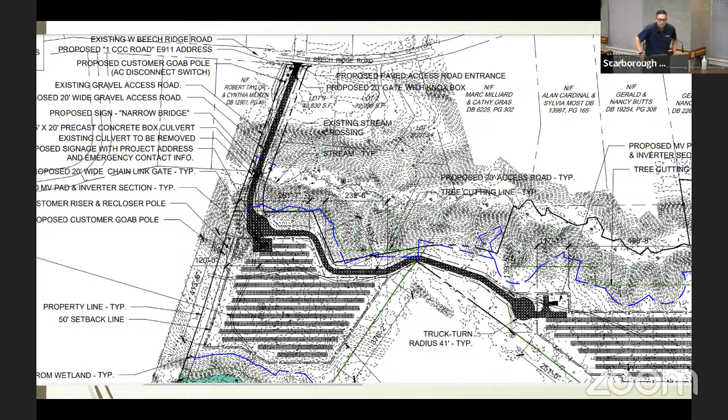Thank you. Let me turn to the board. Any last minute questions, concerns? I have none, Madam Chair. Staff feels comfortable going forward.

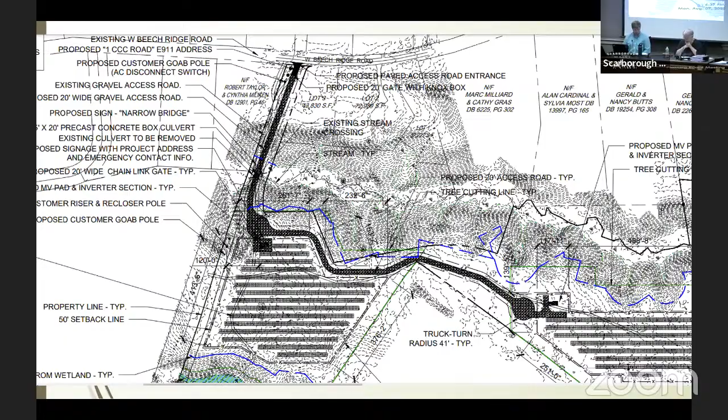Therefore, I have a draft motion. I move to approve the project titled Waterhouse Solar proposed by MEVS LLC as depicted on the plan set prepared by C Energy dated 7/20/23 with the following findings and conditions. Findings: the proposal is for a 2.66 megawatt AC ground-mounted solar installation in the area of 22 West Beech Ridge Road, Assessors Map R42, Lot 2D.

As part of the proposal, the applicant will pave the first 40 feet of the access road from West Beech Ridge Road and replace the existing culvert over Finnard Brook.

Conditions: 1, prior to issuance of a building permit, the applicant shall: A, pay the tree growth withdrawal penalty as determined and approved by the assessing department; B, address comments in the staff memo dated 8/7/23; C, address comments in the Haley Ward memo dated 8/1/23; D, provide finalized surety document in accordance with performance standards for utility scale solar energy systems; E, provide an interconnection agreement from the energy provider.

F, execute and record a stormwater maintenance agreement with the town. The form of the stormwater maintenance agreement is located in Appendix 1 of the Town of Scarborough, Chapter 419, Post-Construction Stormwater Infrastructure Management Ordinance. G, install a private driveway sign in accordance with Chapter 309, Town of Scarborough Street Name and Number Ordinance. The sign shall be white with blue lettering, a minimum of 6 inches in height with lettering not less than 4 inches in height. H, address planning board comments as discussed in the 8/7/23 meeting. This shall be reviewed by the planning department.

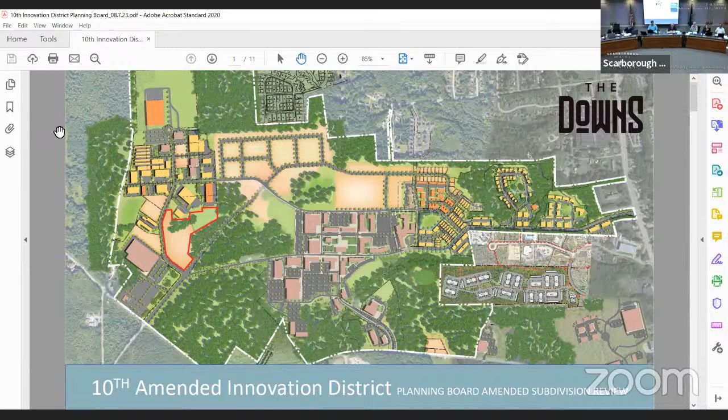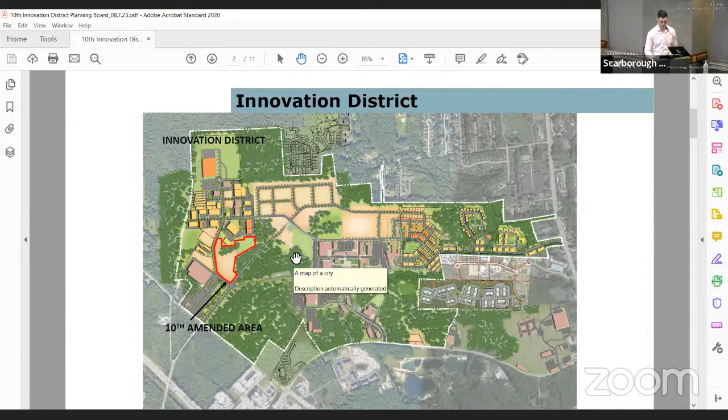So I'm going to skip forward here. I just wanted to orient the board on the location of our application. It's right here in the red, so you can see on the screen. This is the 10th amended subdivision for an innovation district presented in front of you here. Costco is located just across Innovation Way, which is on the northern part of the plan, east on this plan.

Wanted to quickly go over the subdivision scope. Eric did a good job introducing it. A little bit of background: in April of 2022, the board approved the master plan amendment that updated the developable area, and so here we are in the next step for the subdivision application. This scope includes modification of the Lot 2 property line and the creation of a Lot 55 located along Innovation Way.

Included with this will be the trail realignment through Lot 2 previously, and I have actually a next slide that shows kind of the comparison for those two, so I'll wait to speak on that. And I did want to mention that the Maine DEP permit is in hand for this, that was received back in March of this year.

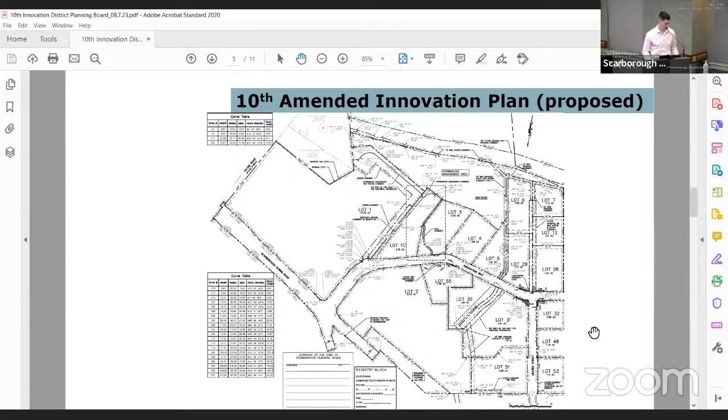This gravel wetland facility will outlet down to an existing ditch that runs east-west, kind of in a field area south of the Innovation District, and then it intercepts another ditch that carries that flow down to Millbrook. So we're not touching any of that infrastructure as part of this proposal, we're just building the pond and outletting it and doing some slight reconfiguration of the initial ditch. And then it's got another 1,000 to 2,000 feet until it gets to the Millbrook tributary down over by Sawyer Road.

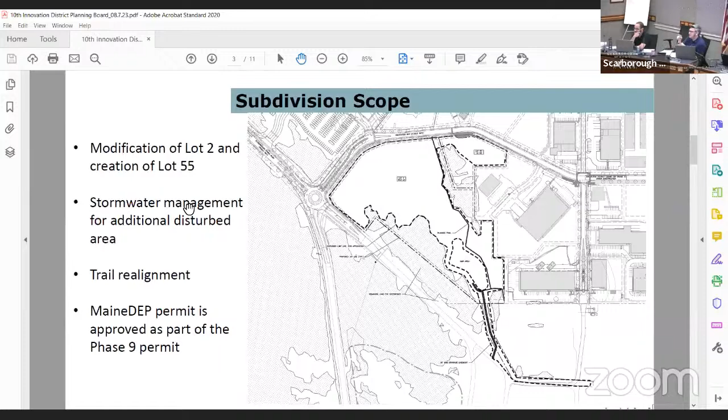Going back to the trail, the original trail images, are there sidewalks? There are sidewalks on either side as it exits out on the Costco Innovation side, is that correct? Correct. And was the realignment of the trail meant to just better suit it to contour against that lot 2 that you're proposing here? Correct. It's just so if any future development there, we're not working around a trail, and it's hugged more towards where the natural resources are, a little bit more trail-like, if you will.

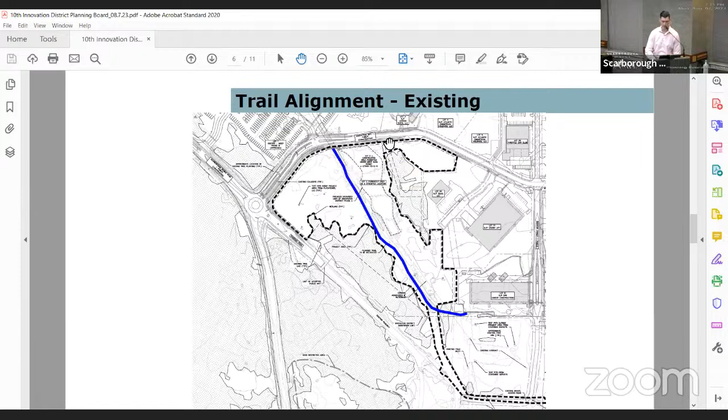Correct. I don't think surface pavement's on Innovation Way yet, so the final configuration isn't there, but the crossing you're referring to is, I believe, right here where there's actually some trailhead parking. The previous alignment brought the trail goers across Innovation Way here and then across there. So I think if anything, this trail alignment is probably a little bit more centrally located by where you'd park and cross. That's one of the benefits of moving the trail here.

Okay, great, that's really helpful. Thanks. My only request with regard to that would just be that the trail is continued in its width to wherever that crossing is. And if it transitions from a stone dust path to a more concrete - no pun intended - sidewalk surface, that's fine. I just think the width is kind of key there.

And I think I saw a note that this trail, the relocated trail, is intended to be 8 feet wide and stone dust. Is that right? So this blue trail is going to be 4 feet wide. There's going to be an access path down here for the stormwater facility to access, that'll be 10 feet wide. A portion of this access path can be used as a trail indirectly, kind of connecting. So that's where the difference might be.

That was my question, was how would someone know? Maybe they don't care, or maybe we don't need them to know whether they're on one or the other. But in terms of navigating, I don't know if there's an overall plan down the road to identify by map or website that the entire development on the Downs is coming with a pretty significant network of trails, which I think is great. Which I sort of know, but that's because I'm sitting on this board seeing all these plans constantly. I think it would be really important and a tremendous amenity to this community to have an easy way to communicate that to the greater public. This is a small example of that, such that you could look at a map and be like, oh, this is a maintenance road that goes to a stormwater pond versus the trail that I want to take to get up to wherever I'm going. So just a little wayfinding question there.

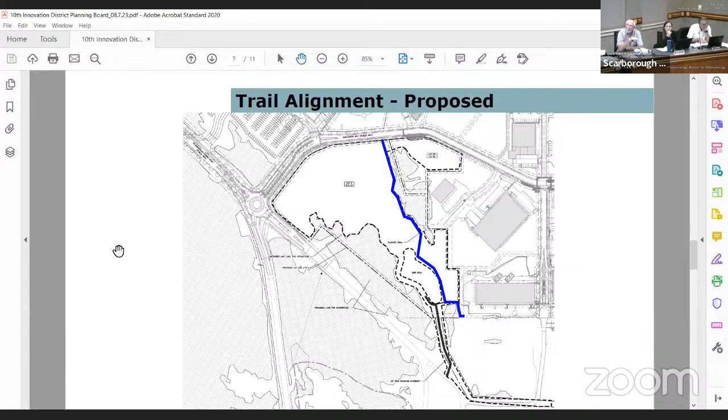If you didn't clear it all right now, do you see a demand right now to clear this and start marketing it right away? And do you see a demand right away to occupy these lots? Yeah, I think speaking to the success of the Innovation District so far, and having all the lots sold out, I'd answer that as yes. Okay, that's all I have.

Thank you. I've got a couple of comments that kind of lead towards what would happen if an applicant came forward with a project for this lot and for lot 55. So I look at lot 55. It looks as though a section of that lot along the street is located where the map of the Innovation District is and the various mailboxes. Is that correct? The mailboxes are further down, but that's the trailhead parking and the sidewalk that bumps around it that we're providing an easement for. Okay. I guess what I would say is the applicant comes to us sooner or later for lot 55.

The placement of a driveway there is going to be very important because of both the turn and the placement of the trailhead, and the location of the mailboxes, which actually on C100 looks as though it's really part of lot 55. So just keep that in the back of your mind as you're looking at that.

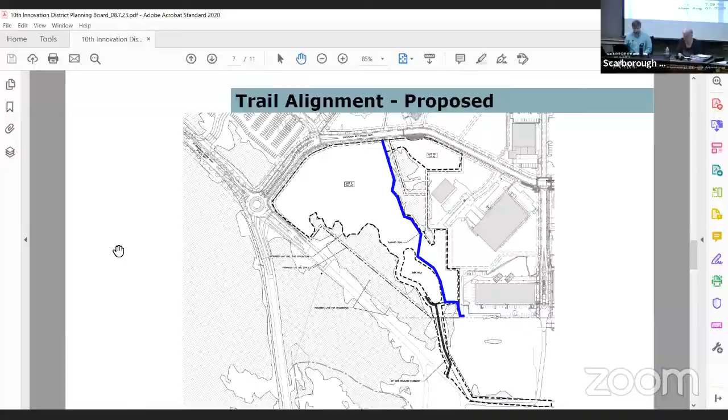Second. Thank you, this is seconded by Roger Beely. Doreen, please call for the vote. Roger Beely, yes. Jennifer Ladd, no. Rick Manking, yes. Rachel Hendrickson, yes. And Jim Huber, no. 3-2, the motion passes. Thank you.

Thank you. I think you should take the rather unusual split vote into consideration as you move forward on this. Understood, thank you.

Next item on the agenda, item 4.04: Allagash Brewing Company requests site plan review of a 9,300 square foot tasting room and demonstrative brewing operation.

Allagash is in front of the board with a site plan request for a tasting room and accessory kitchen at Scarborough Downs. The tasting room would allow for demonstrative brewing as a small batch processing use. Staff's primary concerns revolve around the parking lot landscaping, architecture facing Market Street and the parking lot, as well as a potential overflow parking area.

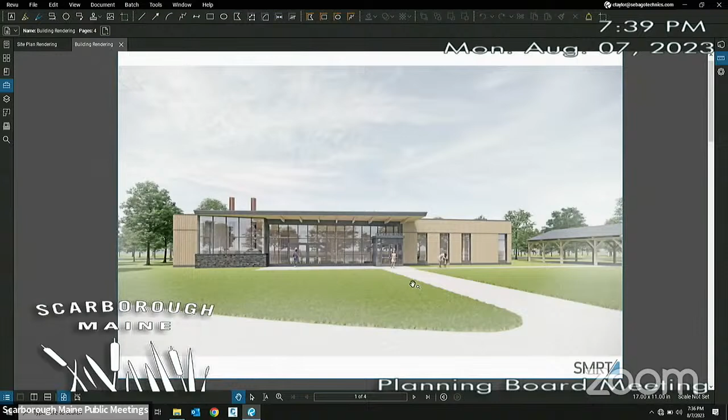The materials are really a modern take on traditional materials. We have heavy timber structure, board and batten siding, masonry which gives you the anchoring to the ground, and also helps identify the showcase of this site. Our rendering doesn't do justice for what's behind that pop up to the left, but that is the home for these beautiful copper kettles, antique brewing equipment from Belgium. That strange trapezoidal shape is a recreation of the space it was originally built into in Belgium, from a strange intersecting street. These kettles are put on display, raised up off the ground, so as you walk by or drive into the site, it's the beacon to come and see, this is their sign, their demonstration equipment, and the reason everyone's going to want to come.

So you can see the kettles extend out through the roof. On the days when that beer is being brewed, there will be some steam that comes out, which will make it look very cool. But overall, we are not showing the correct landscape here. I should note, this is sort of an as-if-it-were-in-Texas landscape, dead flat with a couple trees out back. Please don't take that landscaping image to heart.

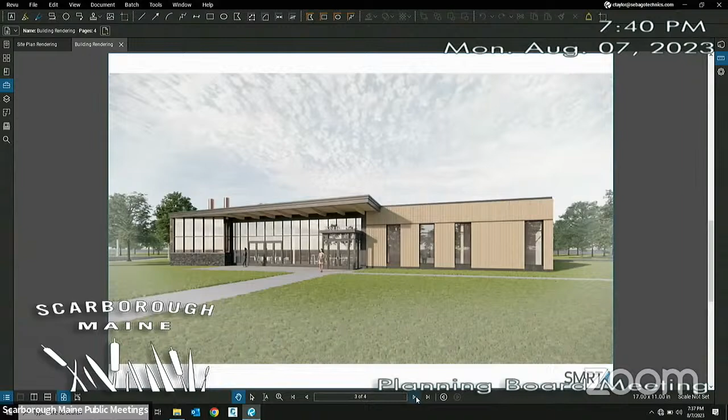Wayfinding was mentioned before in some of the trails discussions. I think one of the things we did effectively here was proportion the materials and the glazing, as well as that pop-out entrance, to help people find their way into this space. If that trapezoidal space with the copper kettles is the reason you're coming, you know the pop-out entrance with the Allagash sign is the way to get in.

One more, just a close-up. The heavy timber structure reflects Maine's tradition of heavy timber woods. This is one of the goals of the project, really sustainability, low embodied carbon footprint. So the structure goes a long way to bring that to the site and to the project.

I guess I've worked through all the high points of what I wanted to hit. Happy to answer any questions if there are any about the look and feel of the building.

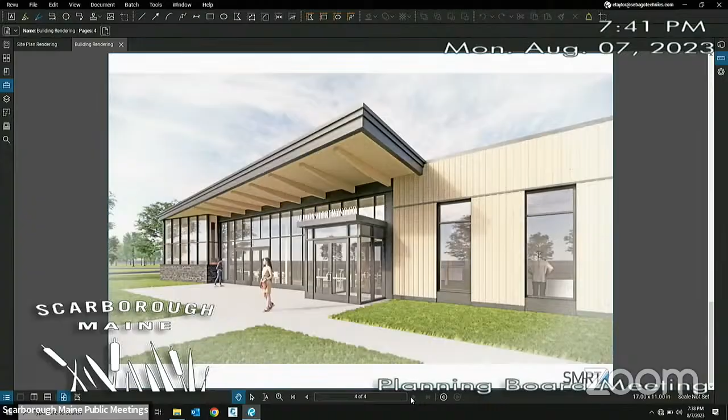Thank you. Go ahead, Jim. You have a question? Thank you, Madam Chair. Andrew, question. So what siding is being used on that in this particular rendering here? What's the rest of the siding? I guess the building siding going to be?

What's the material? Yeah, so I'll go back to the site plan because I'm an engineer. At the corners there, we're seeing in plan at the base a masonry coursing, and then on this backside where the employees have a break room is another anchor, a band of masonry going up the side of the building. The balance of the building siding is, as you see here, board and batten cedar. Cool.

Thank you. Thank you. Are you done with your presentation? I am if you are.

All right, this is an item that is available for public comment. If there is any member of the public in the room or online who would like to comment, please approach the podium. I'll give you to the count of three. 1, 2, 3. Nobody online? Public comment is closed. And turn this over to the board.

I'm just going to go down the line and ask Rick Weinking to start off. Thank you, Madam Chair.

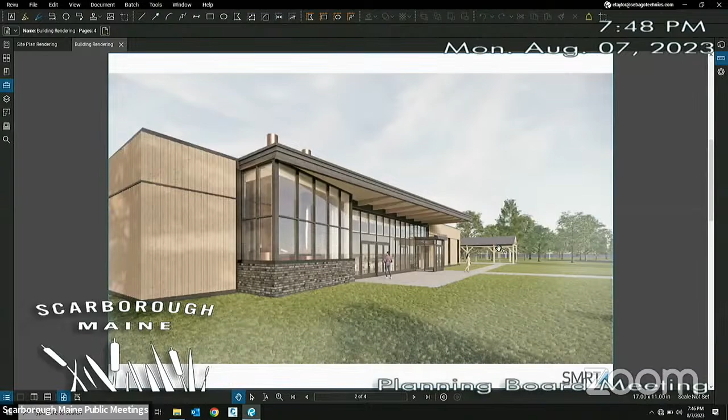Yes, so that building, the orange building you see, this is a canopy structure - that's the orange blob or rectangle you see on the site plan. It's just a post and beam structure. It's at the existing Allagash facility in Portland and they're relocating it to this facility. It just provides some covered seating for outdoor seating, so you can be outside when it's raining in the summertime and when it's nice and warm.

Adjacent to that is going to be an accessory kitchen, shown as a concrete pad right in front of that roof canopy structure. This is intended to be similar to a food truck style, where you'd walk up to an outdoor structure - it could be a building or a shipping container type structure with a pop-out window. The kitchen would be inside of it. You'd order from the window, walk back up to it to get your food.

So it's kind of mirrored around their existing facility. They've basically got a full-time food truck at their facility now, and that's what Allagash is looking to do at this site as well, to provide food to customers while the brewery tasting room is open.

So where does the water and waste all go? Is that staying - is this something self-contained and then moved, or? We are proposing water and sewer stubs to it, and there's a grease trap proposed underground. So we're treating it kind of as a kitchen that would have water and sewer use.

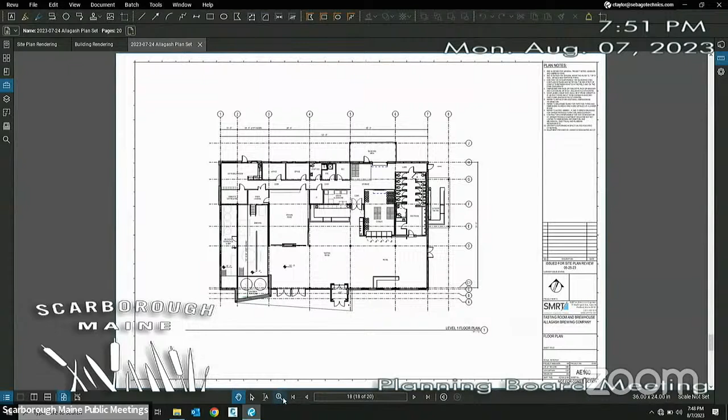So, questions about the bathroom. Effectively, what we have is a non-gendered, unisex stall for every person who enters this space. It serves two masters in a way: it reduces the total square footage required compared to two gang bathrooms, and it also allows for a lot of privacy. It's a system that the Portland campus has been using for a number of years that's worked very well for them, so they wanted to bring that same system across to the new tasting room.

Interesting. Guess I had to go to the one in Portland. You should - actually, I think we held an ASHRAE meeting there many years ago.

But anyway, I do want to note that you have indicated future PV on here, and I'm sure that had some relation to why you positioned the building the way you did, which I commend you on. This is the first time I've seen architectural drawings where the mechanical systems are included with the screening so that we don't see it from the road.

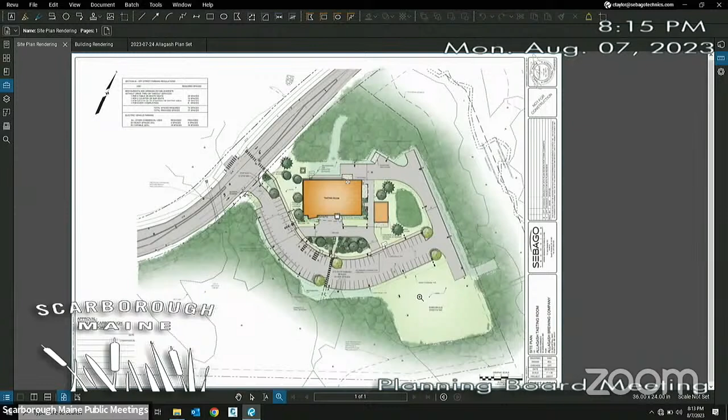So potentially, if you're looking to develop that lower right-hand plan view corner into a parking lot eventually, maybe you have an idea of how many parking spaces you'd be able to put in there, and likely what that design would look like. It wouldn't hurt to put those trees in now. If you have planned ideas for potential shade trees in that area, just go ahead and put them in now, rather than having an open green space that on the hottest of days, not many people would probably go out to. They would probably seek the shelter of a tree closer to the building if they're going to enjoy a beer or another treat at the facility.

So those are my comments about the trees. I'd like to see fewer of the evergreen coniferous style and more of the deciduous style, the shade trees.

The other comment I have relates to lighting. I saw the cut sheet for the light fixture in the site plan application binder. There's one item I'd like to have changed. It's currently with a 70 CRI specification, 3K7 in the model number. I think that should be 3K8. I'd like to see an 80 CRI index—it gives a slightly better quality of light, especially at nighttime, and that's what we're moving towards town-wide for all our exterior lighting. Otherwise, it's 3,000 Kelvin for the color temperature, and I'd like to see that.

Thank you. And this would also apply not just to the area lighting for the poles, but also anything building mounted—a 3,000 color temperature with 80 CRI. The last thing I'd like to see, and I know this is more of a design item for when the building goes to a design construction document set, but I'd like it noted here and accounted for at that point, is programmable dimming capability for all the lights—all the building exterior lights and the parking lot fixtures.

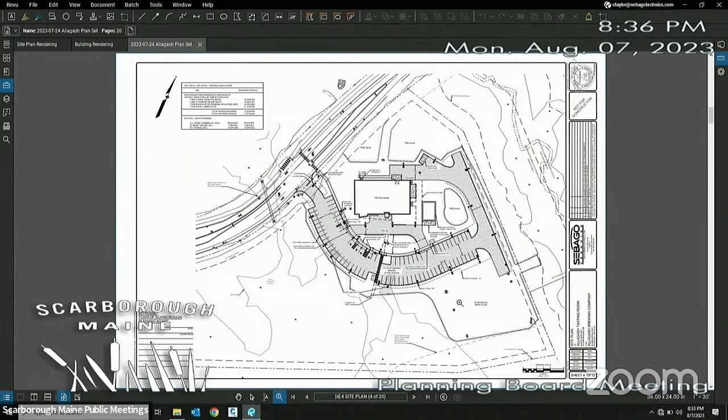And then on the snow storage, if I can get to it here. On the site plan, we're delineating areas with this dashed line for snow storage, shown at certain intersections around the corners and radius, and this area along the edge of the parking lot by the beginning. This wasn't really ever intended to be a huge snow dump from the whole facility, and we don't want a mound of snow on top of the subsurface sand filter, which is going in here. There's a bit more area that could be used for snow storage, but it's not really intended to be a big, large snow dump area.

So in terms of the future, that's any future parking area not taken up by that use. Okay, I think you need to certainly show that on the plans, but I suggest from the plans in front of us, the distance between the tree line, including the wetlands area, and the parking spaces doesn't look terribly wide, and plowing snow into that area means you'll be plowing snow up into the trees.

So just show us that that's not happening. Show us that you actually have that space. Now granted, as we go on we may be seeing less and less snow, but this is Maine, so we're going to have a few good ones. What a lot of other businesses are doing is simply saying over a certain amount of snowfall, it will be trucked off, rather than trying to make do with some space that's not particularly adequate. So take a hard look at that, please.

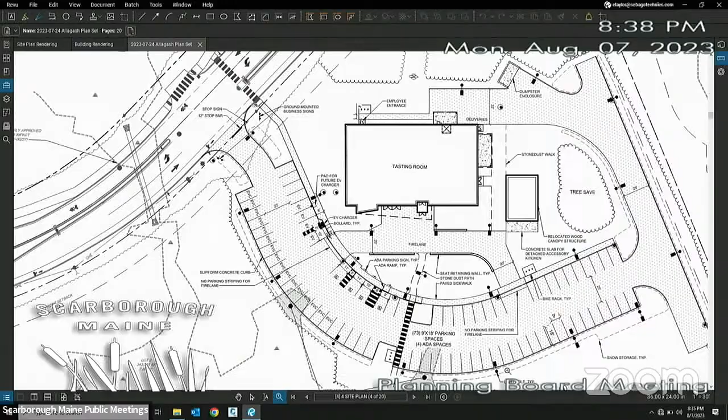And then one last point of clarification is on the parking spaces, the light poles. The light pole itself, this is the symbol for the light pole. The pole would be located here, or in this case down here with the light fixture kind of hanging out over. So the circle on the light pole symbol is the proposed location for the base, so they won't be located within the parking itself. Thank you, I appreciate the correction.

Anything else? That's all I have. Thank you, appreciate the work that you've done here, and this is an exciting plan. I live half a mile away, so I really want you to come. And I can get home if I need to use the facilities. Thank you very much. Thank you.

Next item in the agenda, item 4.05, Keeper Scarborough LLC requests sketch plan review of a parking expansion at Maine Veterinary Medical Center. The expansion would include 67 parking spaces south of the existing veterinary practice, as well as walkways, lighting, and landscaping. The property is further identified as 1500 Technology Way, Assessors Map U39, lots 4731 and 4732.

Eric? Thank you, Madam Chair. So Maine Vet's currently in front of the board with a sketch plan to expand their parking at the existing facility on Technology Way. It would be on 2 adjacent lots next to the existing business and connect to the recently paved 19-space parking lot at that southern end. Maine Vet's indicated that through the loss of a lease for 20 additional spaces further down Technology Way, as well as the regular occurrence of on-street parking and illegal parking on the site, this expansion is warranted. Staff's included in comment some requirements for EV conduit, as well as parking lot landscaping and public safety items for inclusion in the formal site plan submittal moving forward. And with that, I would turn it back to you, Madam Chair.

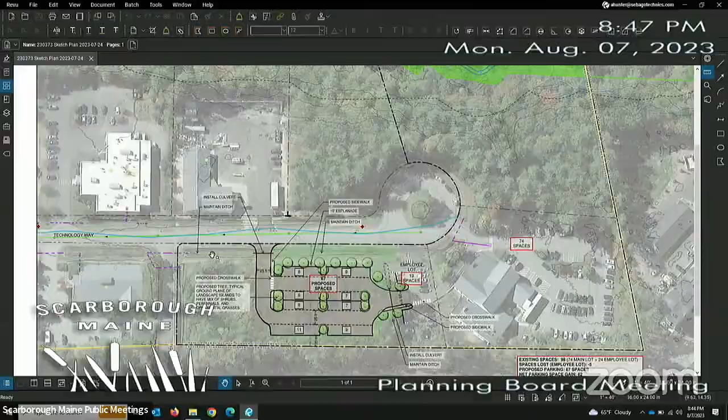In regards to stormwater, there's an existing DEP site location permit for the whole development. There's a pond located further down off the left of the page. All the stormwater from this area of the subdivision is collected in the ditch along the road and flows to the pond where it's treated and detained. We did speak with DEP and they're not going to require any additional permitting, which is a bit different than what we had originally thought in our sketch plan application.

So as long as we're within the impervious thresholds that they allow as part of the permit, there's no additional permitting, which we're planning to stay within.

In regards to traffic, there's no building expansion, so we're really just accounting for existing traffic needs to provide safer circulation and room for emergency vehicles and winter plowing operations.

We'll submit a memo as part of the site plan submittal discussing the different traffic components. That's pretty much all I had right now. Just looking to hear any feedback you might have as we work towards site plan submittal, planning to get there by the end of the month.

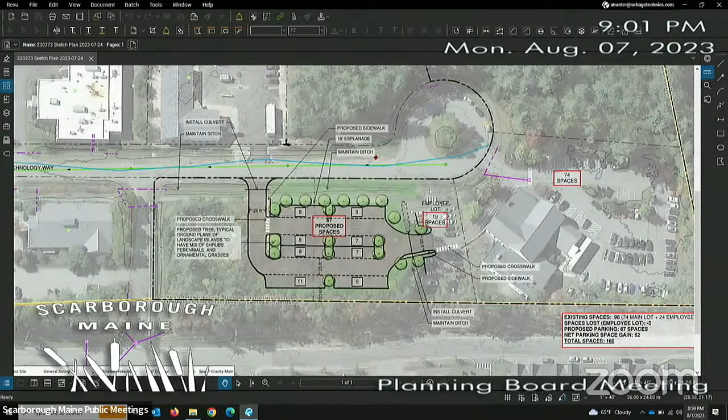As a matter of fact, the ordinances call for only one exit. So I guess I would say those are three separate lots. As approved, it is under one ownership. I'm not sure if there are plans to close off access to the employee lot. It is a one-way only entrance, so that does help a little bit. We were proposing for the new connection to be two-way, with an entrance and an exit.

So I recall when we discussed that a couple of years ago, one of the issues we were concerned about was the location of that employee entrance, because people would be unclear whether they were supposed to go around the roundabout, the cul-de-sac there, or whether they could turn left, creating a potential traffic problem.

I think also we may have done a waiver, which somebody would have to look up, because the entrance to that parking lot was under the required distance from the entrance to the main building. And while there could be a waiver for that, I personally think three entrances, or curb cuts, are too much. I think you could get away just fine with two, closing off the middle one. So please consider that, and I'm going to ask the staff to take a look at the original approval and some of the discussion around how that curb cut was done.

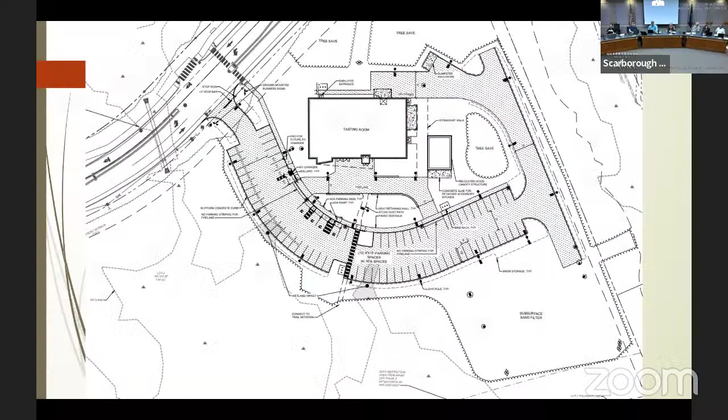Very minimal tonight, just noting that the next meeting is August 28th. That's all we have. And we do not have a workshop. Nope, not at this time. Okay. All right.

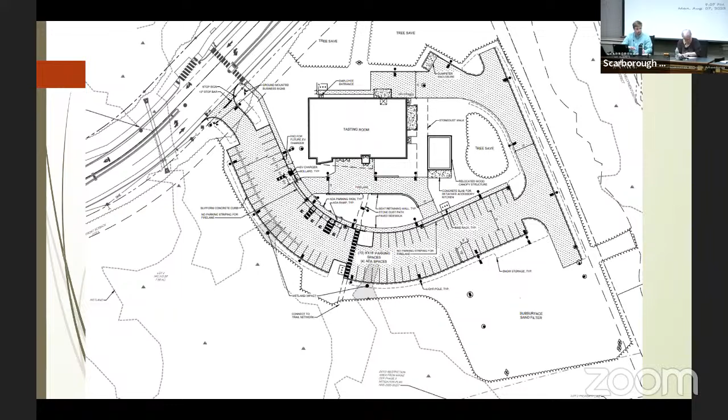5.01 minor development reviews. None at this time.

5.02 administrative amendment report. So we do have one, as the board might recall, Mercedes-Benz at 137 Route 1, sort of in the northern part of Route 1 in town, got approval for some building additions. In order to relocate the staff from those additions, they are bringing in a couple of trailers, which I think typically would be used for construction offices, but in this case, they're actually being used to temporarily house the employees. Yeah, they are there. So we have that application and we're currently working with the fire department to make sure that they have what they need. So that's something that's currently under review.

Thank you. 6.01 correspondence. Not at this time. 6.02 planning board comments.

Roger: Eric, it seems like we've approved quite a few projects in recent weeks, but I haven't been signing many plans. Is there some reason why? I know that you get something over there now. Yeah, I did forget to mention, we do have the town center subdivision plans for signature. I think the nature of that is just, we've had the innovation district subdivision amended, town center came through. There was Haigis, so there have been 2 or 3 that have come through, but since I've been here late 2021, we honestly haven't had that many subdivision approvals. It's mostly been site plans.